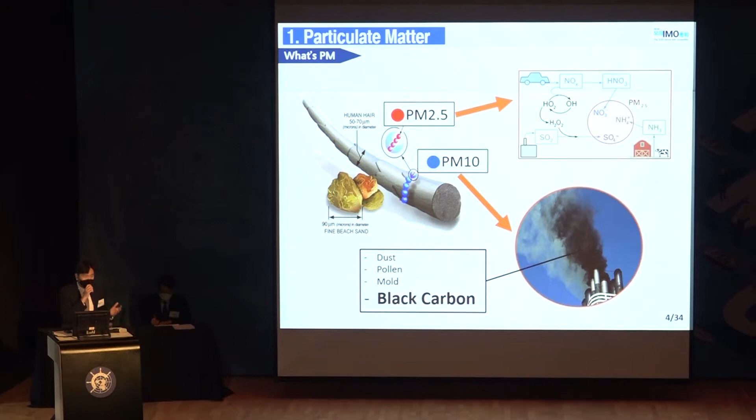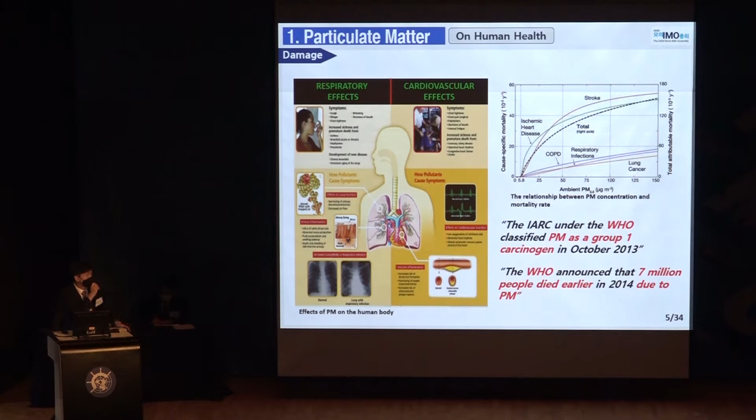This presentation will proceed in the following order. Particulate matter, PM, is a particle which is much tinier than human hair. It's divided into PM10 and PM2.5 according to the diameter of a particle. And it's composed of primary PM represented by black carbon and secondary PM created through interaction of pollutants. This is the effect of PM on human health. WHO classified PM as a group 1 carcinogen. And the higher the concentration of PM, the higher the mortality rate around the world.

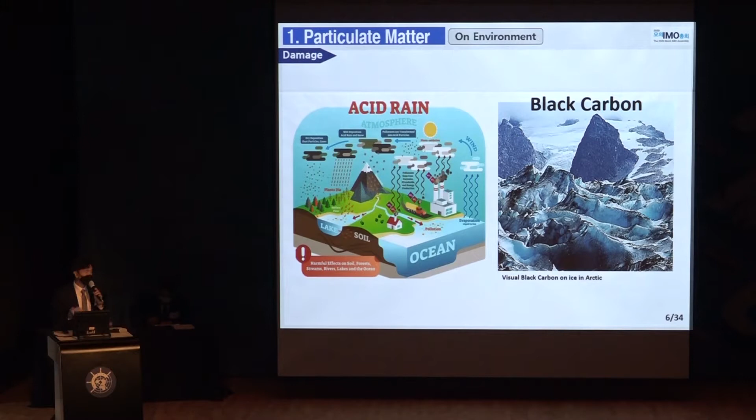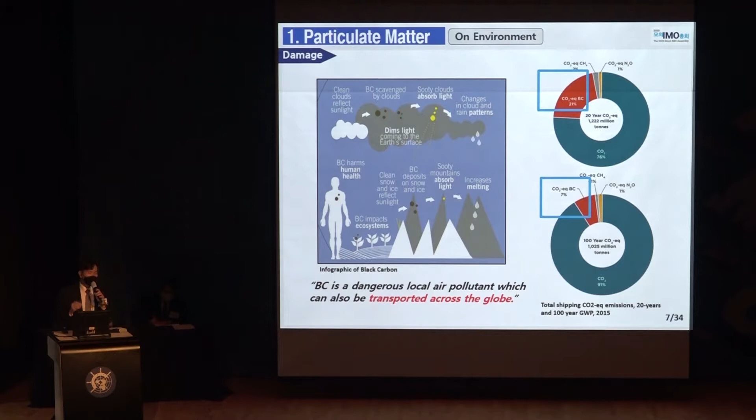The effect of PM on environment. PM causes acid rain and damages environment in the form of black carbon. Black carbon increases the temperature in the atmosphere by absorbing solar energy and affects global warming. Black carbon is the second largest contributor to GHG after CO2, and it can also be transported across the globe. These data show particulate matter is a worldwide problem. But the real problem that maritime industries should pay attention to is that it is being emitted from ships.

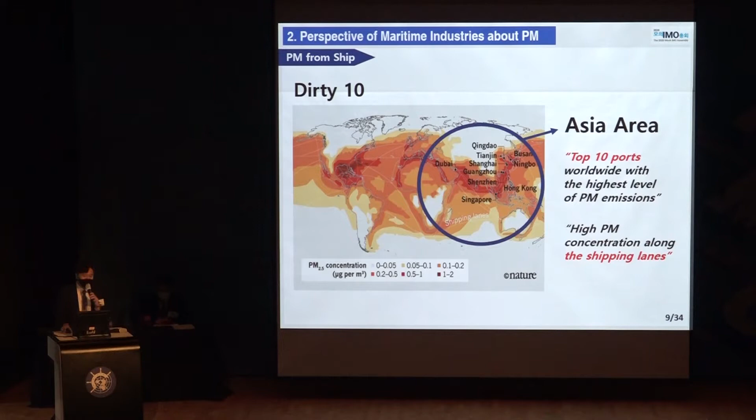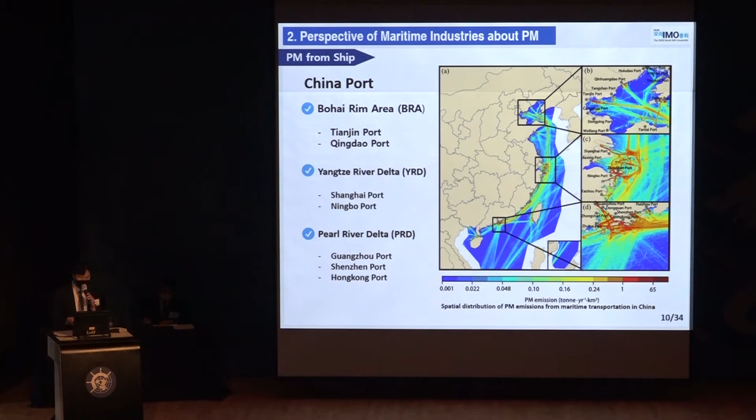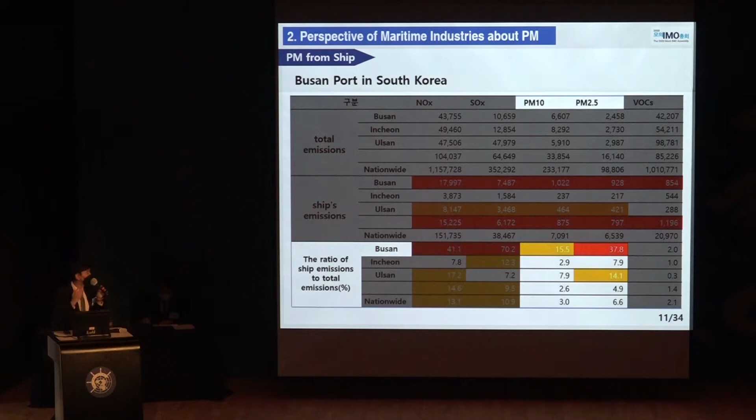According to the data by Nature, PM concentration is being measured high along the shipping lanes. High levels of PM are observed at 10 ports in Asia area. Among these, we will proceed using several ports. First, in China, high levels of PM are observed in 3 hotspot regions where large ports are located. Among 10 ports announced by Nature, 7 ports in China are all in these 3 hotspot regions. Next, Busan Port in South Korea. The ratio of PM emission from ships to total emission of Busan City accounts for a significant amount.

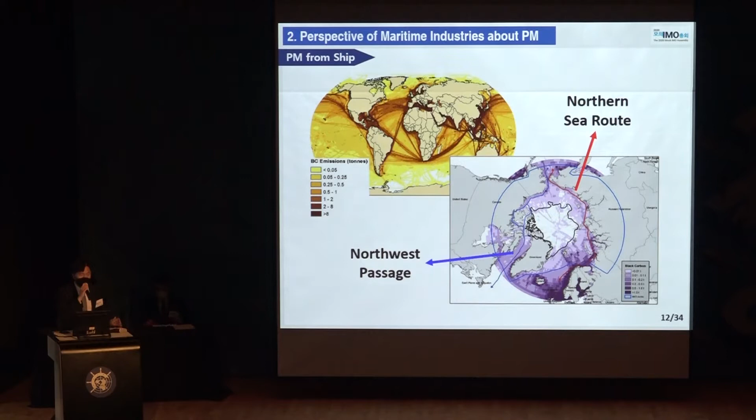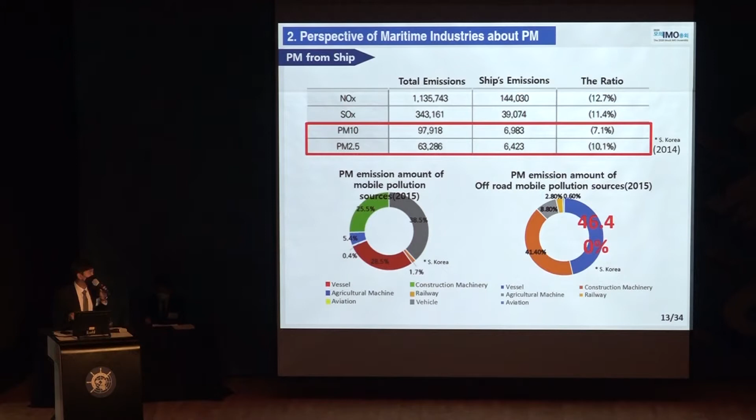And black carbon, which is a fraction of PM, is also measured high around the world, especially in Arctic regions along the course of ships. Additionally, according to the statistics of South Korea, the ratio of PM emission from ships to total emission and the amount of PM emission of mobile pollution sources are significant.

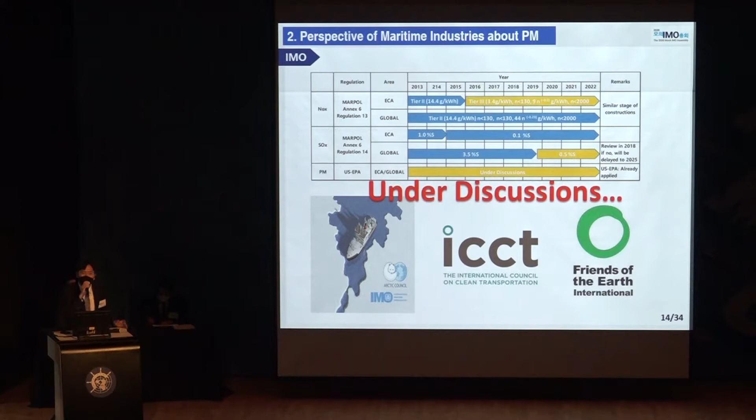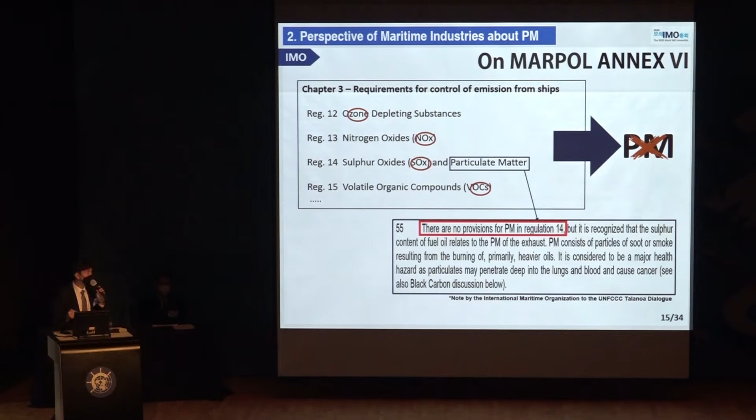Despite the fact that PM emission from ships is currently serious, it only remains under discussions led by related institutions, and there are no single direct regulations dealing with PM only in MARPOL. Although MARPOL refers to PM in the title of sulfur oxides and particulate matter, it is only referring to PM accompanied by emission of SOx. Now, I will invite the next speaker who will explain current cases for abating PM.

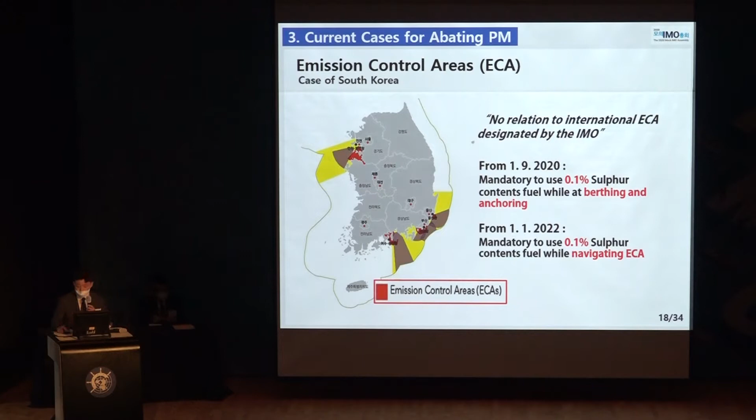The first policy is ECA. Korea implements their own ECA apart from the IMO ECA. This policy has taken effect from this September and will be applied in order of berthing and anchoring ships and navigating ships. China also applied their own ECA called DECA. DECA coincides with the aforementioned 3 hotspot regions which have high concentration of PM.

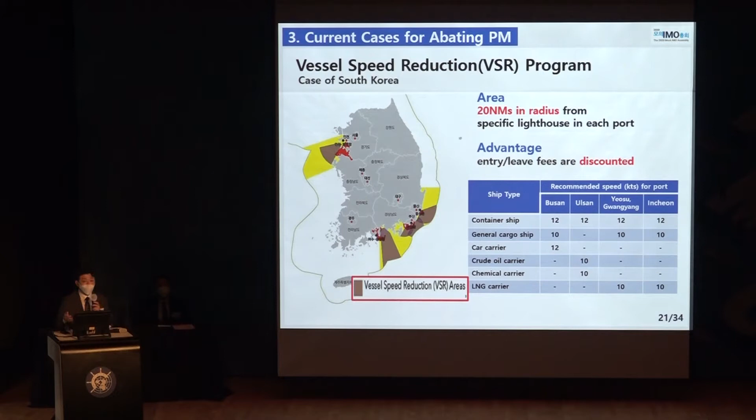Next policy is VSRP. In Korea, ships participating in this program should reduce their speed to recommended speed when passing through VSR zones. Ship owners would get a benefit like port entry and leave fees discount in return. For Los Angeles Port and Long Beach Port, USA, VSRP sea areas are 20 and 40 nautical miles. Ships that enter these areas with speed at or slower than 12 knots will have their berthing rate reduced.

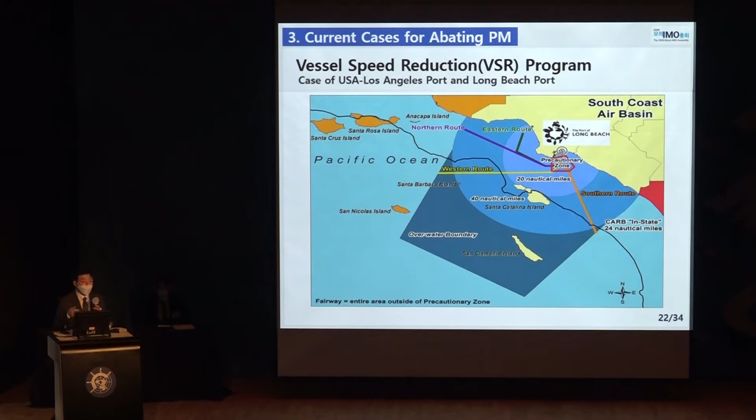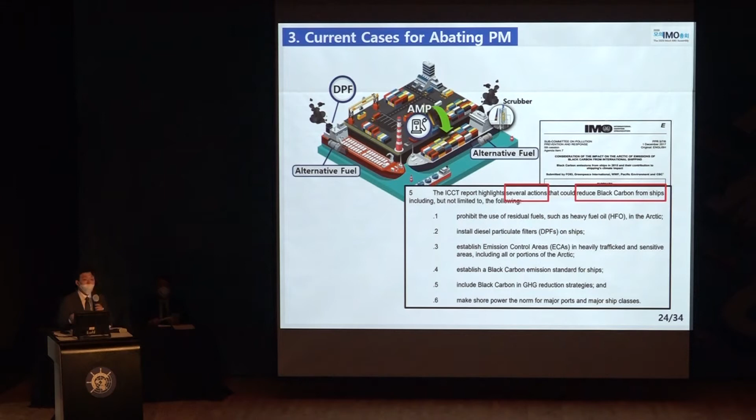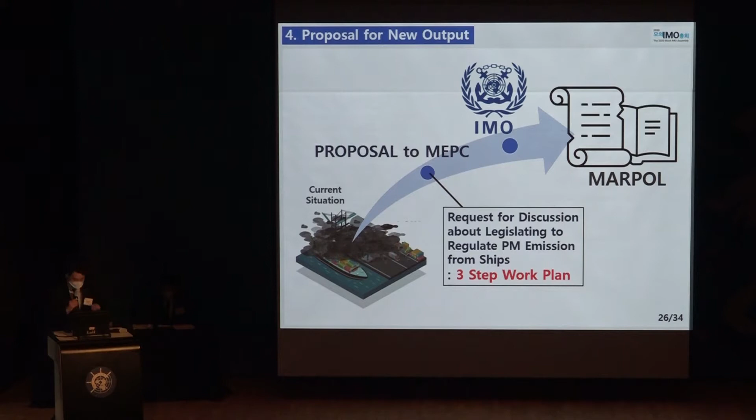Thank you for introducing me. As we have said so far, this team would like to suggest the need for discussions for legislation of a new regulation. So this delegation would like to suggest a three-step work plan, which has an ultimate goal of making new regulations. So this is the three-step work plan. This is the direction for the discussion for legislation of new regulation for the control of PM from ships. Phase 1 will be considering preceding conditions for new regulation, phase 2 will be selecting effective abatement options, and lastly, phase 3, legislating regulations.

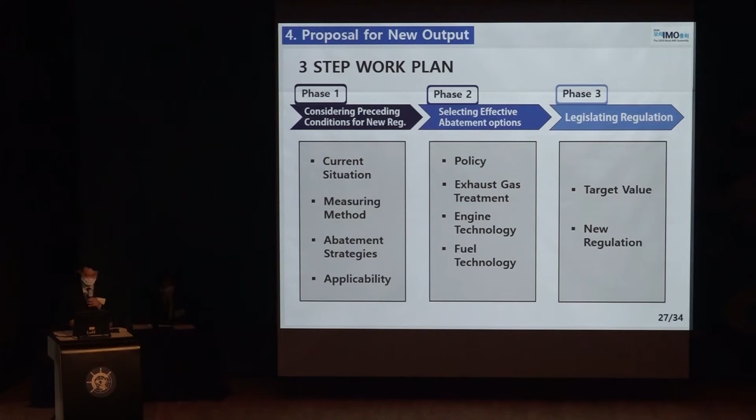For phase 1, the member states should consider these 4 prerequisite conditions: current situation, measuring method, abatement strategies, and applicability. Firstly, check the current situation on emission problems and damage by PM and ongoing discussions for this matter. Then we should identify the measurement differences between PM and BC, and select the most highly effective abatement strategies in terms of policies and technology. And for applicability, we should consider the differences between the nations' technology level and the directions of policies.

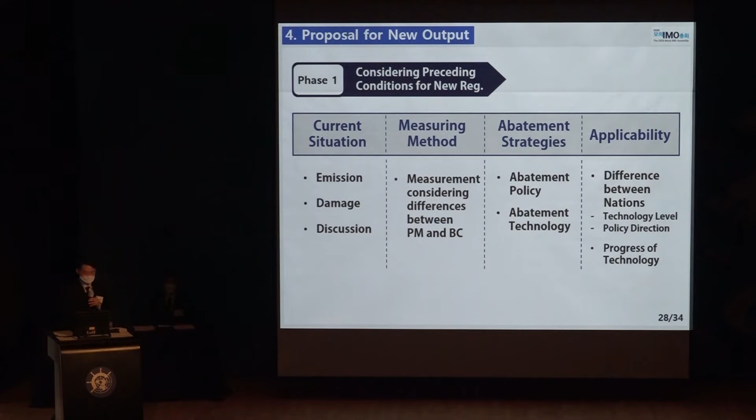So this is phase 2. Here are several options recommended by us, and some considerations are in each box. First of all, for the establishment of PECA, comply with the current registration process of IMO for ECA as stated in MARPOL Annex VI, Appendix 3. PECA should be established in the area where the PM emission problem is severe, waters where the IMO has not yet addressed the control of PM from ships. And lastly, the regulatory level should be set based on the upcoming PM regulation in the near future.

Let's move on to applying VSRP. For the VSRP, the consideration of implementation for VSR should include these 4 things: reduction rate of speed, VSR program zone, speed monitoring, and compensation for ship owners and charterers. On the other hand, in the technical aspects, the use of DPF would be the most recommended option by us among exhaust treatment systems. Those 2 graphs show a significant gap, at least 90%, between the before and after data of the emission.

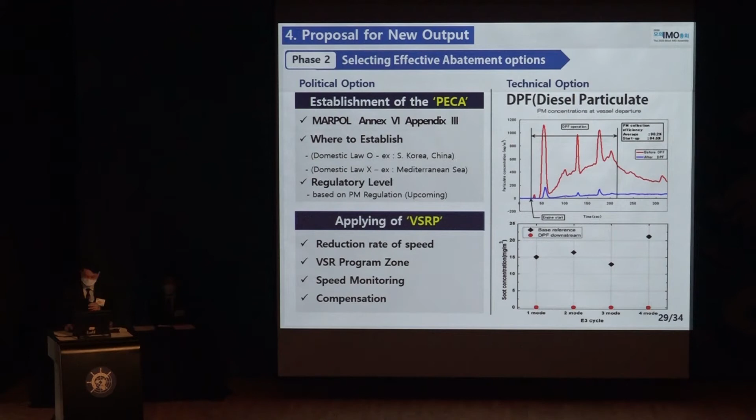In conclusion, this team has reviewed and contemplated 10 IMO considerations for proposing a new output, which will be high priority in terms of necessity, urgency, and economic benefits; its effect is much greater than the input cost for PM reduction. Thus, this team would kindly request the Assembly to consider the above proposal and approve the new output into MEPC's biennial agenda. And these are the references.